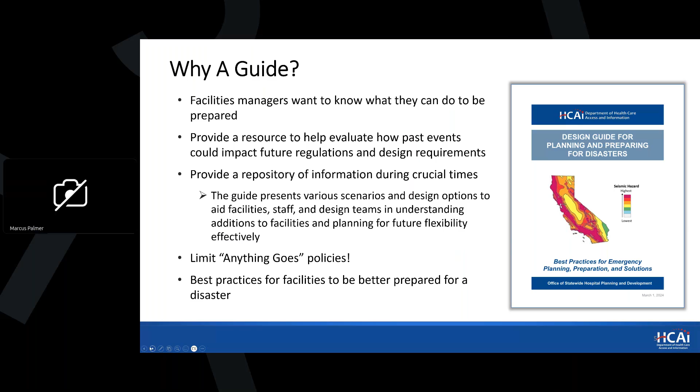It does quite a few different things. Of course, it provides various scenarios and design approaches for designers and owners for allowing flexibility for future design and construction. But it also does things like limit the anything-goes practices that were experienced during the pandemic. Ultimately, it boils down to providing a best practices guide for designing facilities to be prepared during a disaster.

The guide applies... man, I'm having trouble advancing, so bear with me a little bit.

The guide applies to new facilities as well as major alterations for existing facilities, ultimately providing planning for the unknown. Hard to design for the unknown, and that's what this guide is sort of targeted at. It ultimately provides flexibility in various different design things, adapting existing systems for facility access, utilities, emergency projects, and so on, as well as future design flexibility for future care options.

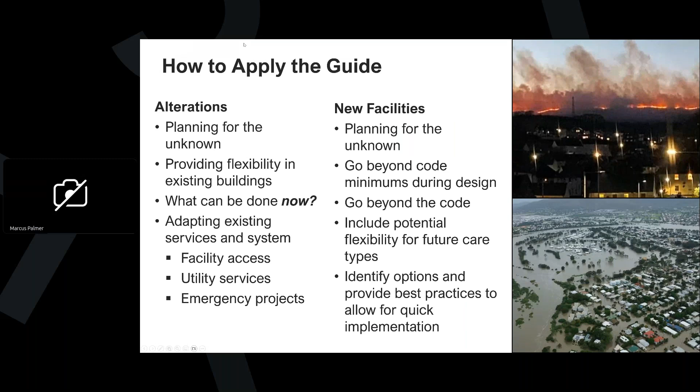Ultimately, it's a design guide that will show that designing beyond minimum code is going to be required. This guide's designed to be used by owners and operators, of course, design teams, local agencies, planners, contractors, and then, of course, other people who are involved in planning for future impacts.

So a little bit of history. It started during the COVID-19 pandemic, where all facilities got really caught by surprise and were struggling to find ways to provide safe environments for staff and patients that they were caring for. OSHPD was called upon to help mitigate and deal with some of these issues, like, how do I make everything negative pressure or 100% outside air and so on. Ultimately, as a result of all this, there was some discussion about whether OSHPD was going to change the code to incorporate these lessons learned during the pandemic.

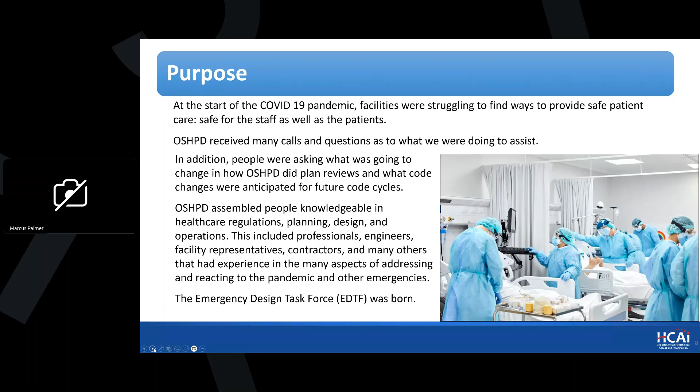So OSHPD assembled a group of people knowledgeable in healthcare design, planning, code, etc. And the Emergency Design Task Force was ultimately created. This task force, come on, slide. This task force was tasked with identifying not just things related to the pandemic, but also other maladies such as wildfires. The lag is killing me. Such as wildfires, earthquakes, floods, and so on.

And interestingly, it was determined that for normal everyday operations, current code was probably fine. But what about facilities that needed to be designed to accommodate other types of situations? For instance, a pandemic resilient and ready facility. This design guide also addressed many of those options to prepare for future events.

The technology and processes learned were incorporated into the design guide and offered options such as switchable air volumes, redundant services, or incorporating new technologies into practice. And this design guide tries to cover all of those things. So with that in mind, this design guide has great cross-sectional application.

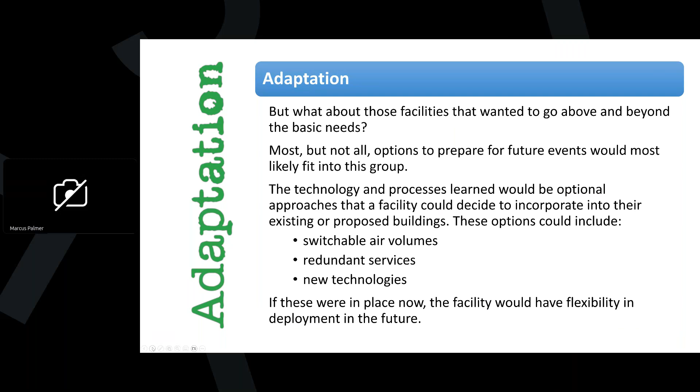Please advance. So, Janice, I'm going to take this one. I know

And with that, Janice, I will pass to you. Great, thank you, Gary. Oops, I think we skipped a couple of slides here. Apologies for the lag. Looks like we're going back to session objectives if we can. All right, so today's, oh. This is crazy.

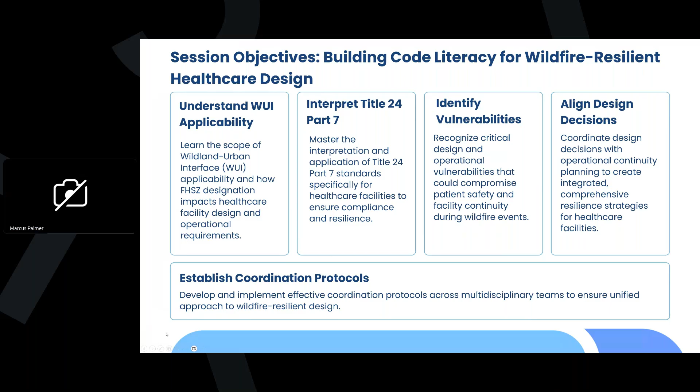And the reason this conversation has become so important is because wildfire behavior itself is changing. So why does this matter now? Wildfire behavior is evolving rapidly. We're seeing longer fire durations. We're seeing more destructive fire behavior. We're seeing broader smoke impact zones and increasing strain on infrastructure and healthcare systems.

And increasingly, we're realizing there really is no longer a traditional wildfire season. Wildfire is no longer a seasonal thing. This is really becoming a year-round operational concern. So one of the major lessons learned from recent events is that ember-driven ignition, and not just direct flame contact, is often the primary failure mechanism affecting buildings.

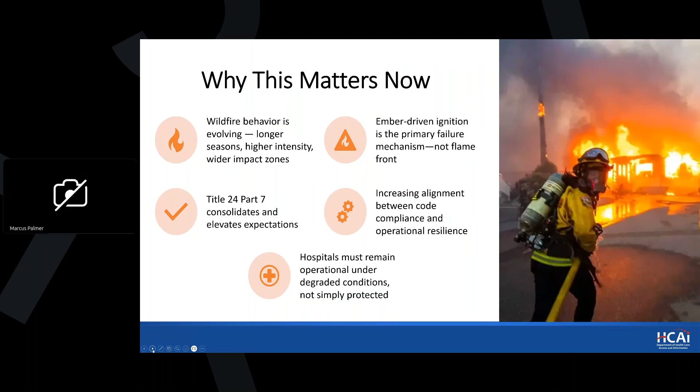And for hospitals specifically, the objective is not simply surviving the wildfire event. The real objective is maintaining operations during degraded or exigent conditions. So let's look at how our agenda today is going to be organized. We'll begin with talking about what WUI is and how fire hazard severity zones affect healthcare facilities, how Title 24, the new Part 7, applies. And from there, we'll transition into operational impacts, smoke readiness, and emergency planning considerations.

So first, what exactly is the wildland urban interface? And what is the WUI? WUI stands for Wildland Urban Interface, and it refers to areas where development meets or intermixes with wildland vegetation. For healthcare facilities, this matters because wildfire exposure is no longer limited to remote forested areas. Hospitals may experience operational impacts from wildfire even when the fire itself remains miles away. Next slide.

Once a facility falls within a WUI designated area, additional design and planning requirements may be triggered. And so with WUI designation, one of the important things to understand is that this is not just a map label or a planning exercise. Once a facility falls within a designated WUI area, that designation can activate mandatory code requirements tied to building materials, defensible space, vegetation management, and ignition-resistant construction. And these requirements can affect projects very early on, from budgeting and design assumptions all the way through approvals and long-term operational planning.

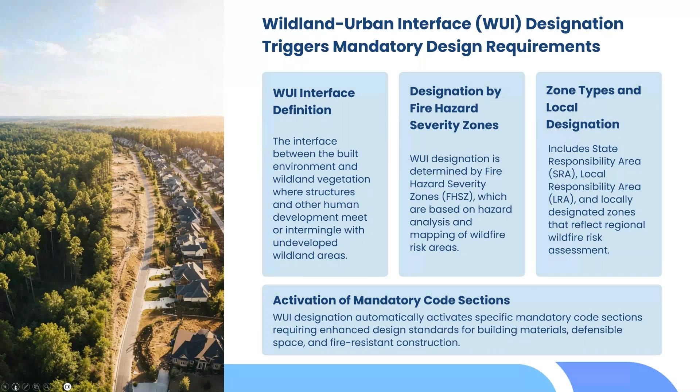Another important point is that wildfire resilience is a layered approach. There's no single feature or system that's going to solve this problem by itself. It's really a combination of exterior hardening, defensible space, infrastructure resilience, operational planning, and emergency coordination that collectively improves survivability and continuity. Next slide. So healthcare facilities will face several unique wildfire exposure pathways.

Healthcare facilities will experience wildfire differently than many other occupancies. What makes this especially challenging is that several impacts can occur simultaneously. You can have smoke infiltration affecting indoor air quality, along with road closures that are affecting staffing and deliveries and logistics, along with utility instabilities and public safety shutdowns, degraded visibility, and ember exposures occurring all at once.

And importantly, many hospitals experience operational disruption before flames ever approach the facility itself. So as an example, smoke alone can strain HVAC systems, impact vulnerable patient populations, and change how facilities operate day to day during an event. So wildfire disruption often happens without the building ever burning. Next slide.

So why does fire hazard severity zone matter? One of the primary tools in California that we use to classify these risks is fire hazard severity zone maps. One of the reasons these are so important is because they can influence multiple aspects of both facility planning and long-term operations. There are a number of different factors to consider, including construction requirements, defensible space obligations, insurance and risk considerations, campus hardening priorities, and long-term capital planning.

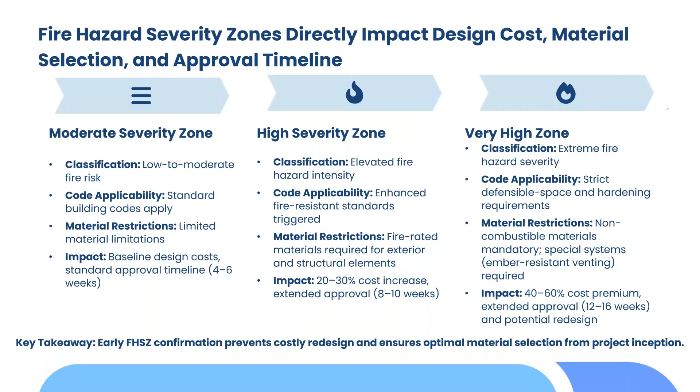These designations can directly affect cost, materials, and project timelines. As wildfire severity increases, you can potentially anticipate construction requirement increases, material restrictions, approval timelines can take a little bit longer, and there's a redesign risk that also increases significantly depending on what zones you're subjected to. So if you have early confirmation of fire hazard severity zones, this can help avoid costly surprises later on in the project. Next slide. So to help walk through how facilities determine their fire hazard severity zones, I'm going to hand this off to Nancy.

Thank you, Janice. So next slide, please. So how to determine if you are in a fire hazard severity zone. There are a couple tools to use, and one is right off of CAL FIRE's site. They have the map. You can use the QR code there to get to that. If you can go to the next slide, please. We at HCAI OSHPD have our EOC map as well, but we'll get to that one in a second.

But when you look at both of these maps, the SFM map and HCAI OSHPD, I'm going to want to say OSHPD first, but I'll try to remember to say HCAI first. But anyhow, if you look at both of these maps, you'll see the zones in the different colors as well. So you have your high severity and your moderate. You'll see those different zones, your moderate, high, and very high, in the different colors.

And what zone you're in, there are going to be different code requirements that come into play depending on what zone you're in and what applies, which code applies, does it apply when it's existing or is it just new, and we'll get into that a little bit too. But for now, just so you can use either of these maps. You can go to the next slide, please.

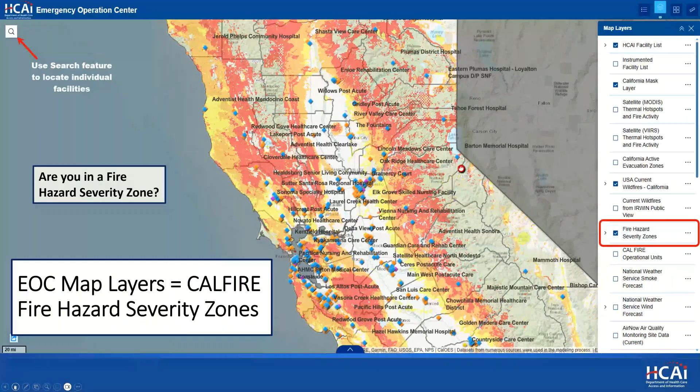Thanks, Nancy. So, as if wildfire hazards and WUIs are not self-evident, I'm going to pull us back into the hospital-specific aspect of the wildland urban interface. Next, please. From an operational perspective, of course, hospitals are unique occupancies. They operate on a 24/7 basis and have highly vulnerable occupants who have limited or no evacuation capability. So the challenges during a wildfire are inherent in that. And the fire department incident command group will need to account for this as the fire progresses and plan early.

What's unique also about hospitals is that we operate on a regional basis, and a closure of a single hospital can have cascading impacts across the system. At Cedars-Sinai, for instance, if we had to evacuate the hospital, where could we send 1,000 patients? Because that's what our census is today. What hospitals who are also full in the region could accommodate 1,000 patients? With that in mind, design failures have a community-wide public health consequence, and that's why we want to focus on our presentation today. Next.

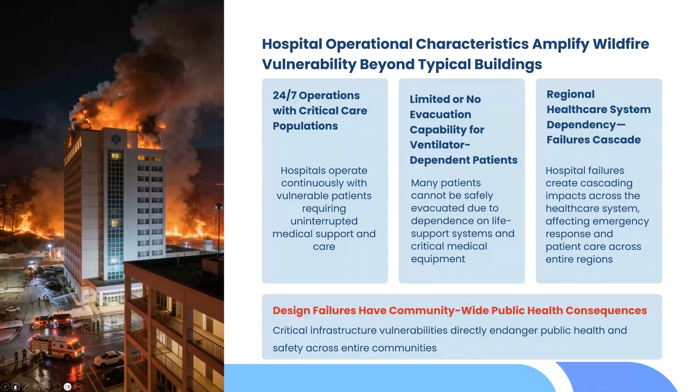Wildfires pose multiple challenges to a hospital, of course. Adding increased filtration, like a MERV 13 filtration system, can overburden the HVAC system. Killing outside air can have negative health effects if done over a prolonged period of time. Despite HVAC efforts, smoke infiltration still occurs, and that can obviously have a huge detrimental effect on respiratory challenged patients.

Wildfires have a tendency of disrupting power by just destroying power lines that feed the facility, or through the public safety power shutoff process that the power company may do. Lack of power, of course, at a hospital has a huge implication. Other things like staff inability to even get to work to be able to take care of the patients, or limited access for supply deliveries, like a fuel truck getting in to refill the generator.

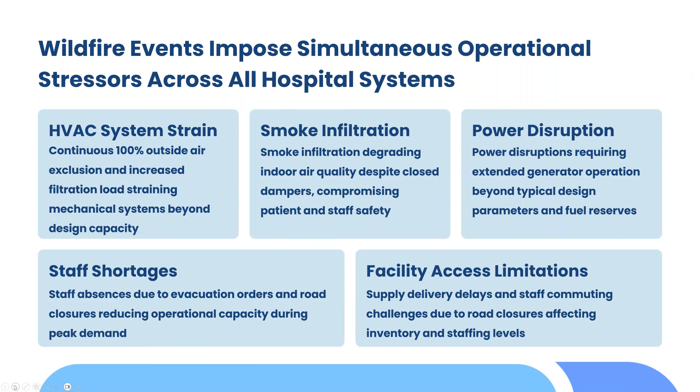All these things are affected by the wildfire and are unique to hospitals that are generally going to continue to try to be operational during the event. With that in mind, that's why all of the code stuff that we're going to go on to talk about today has huge implications. Next. All right, so talking about code stuff, let's go to the next slide, please.

So where did this all come from? So Part 7, it has its own part now. Well, your Part 2 is your building code and so on, but Part 7 is new, but the information in it isn't necessarily new. There are some new requirements, but what you were used to seeing in Part 2 in CBC Chapter 7A, a lot of what I'll be talking about these next few slides, was from 7A, and that's moved over into Part 7.

But also this became kind of a one-stop shop for what was already out there. You have your, like I said, CBC 7A, you have your CFC, your Fire Code, Chapter 49, Title 14, Public Resource Code requirements, the Health and Safety Code requirements, and the California Government Code. All that information was still out there. The user had to be familiar with what was in each of these to apply to these areas.

So what Part 7 does is just bring it to this one-stop shop, and it is based off of, like our other codes, the International WUI code, and California took it. We made some changes like we do, and now we're here. So again, it shouldn't be new to you if you've been doing this for a while. It's just all now in one location for you. Go to the next slide, please.

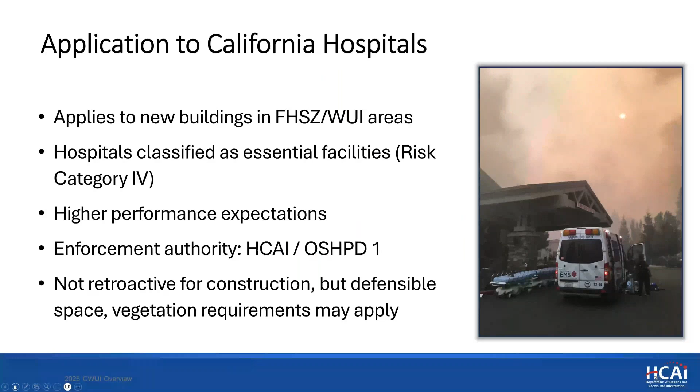So with the vegetation, again, yes, that has to be looked at, but that's going to be on the local side. And the requirement in there now is, as you see here, that prior to the building permit final approval, that vegetation management needs to be approved. So going back to that local AHJ form again, just like most of our projects, not every single one, but you got a new building, you're going to get a form from our reviewers on that first review. That's your local AHJ form with those 3 pages or so of the items that we would like them to look at.

We give that to the design professional of record on that first review. The design professional of record sends that out to the locals. And this is a courtesy to the locals, that we at OSHPD, HCAI, are always going to be looking at code minimum. But locals may have something else that they're going to want in place. So this form is that vehicle that allows them to say, hey, you know what, I've got a different requirement for my fire access road than what code minimum is. And they'll note that in there and we'll review to that.

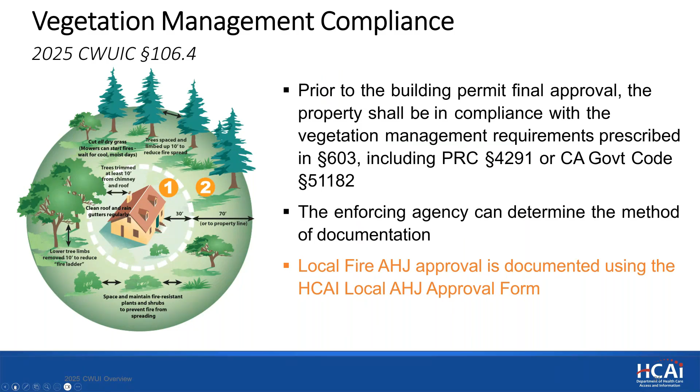So in this form, again, they're going to be noting the zone that the facility is in, and they're going to be looking at the vegetation, but that's going to be the project that's submitted to them, that they need to look at that part of it, along with some other things. So if we could go to the next slide, please, we'll talk about some more of those crossover areas. As I already mentioned, the fire access road, that is one. We want to make sure, do they need more than what code minimum is? But in addition to that, if they're in a CWUI area or fire hazard severity zone area, there are additional requirements that need to be met for the fire access road.

Water supply: there are requirements that you're probably familiar with from CFC Chapter 33 when the building's under construction, for any building. But when the building is in a CWUI area, there are additional requirements for water supply during construction. So this is something to be mindful of, because the project's coming to us, we're looking at that water supply, and you need that there before construction, but locals may want something different. So that's another one you want to be on early on. The requirement is that the water supply is there prior to and during the time of construction. So again, that's something we need to look at early on along with locals.

And then there is an exception, though, if locals say, hey, we've got an alternate plan, we've got tankers, we've got what we need. There is an allowance there for the alternate. But again, just be mindful of the timing of this, because you need that water prior to and during construction, we've got to have that communication with each other. So the approved water supply, how much do you need? When does it need to be there? We're looking at that. There needs to be standby power for that water supply.

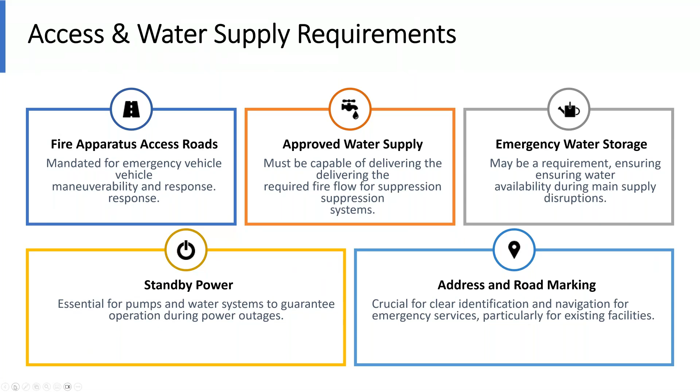Next slide, please. I kind of just went through what the next slide actually is, but again, the fire access roads have more stringent requirements like the width, the grade, the turning radius. As I mentioned, what's the required flow and the calculations that need to be there? What is that for when you're in a CWUI area? And are locals okay with an alternate, or do they want that in place before construction? And then the backup power again. Next slide, please.

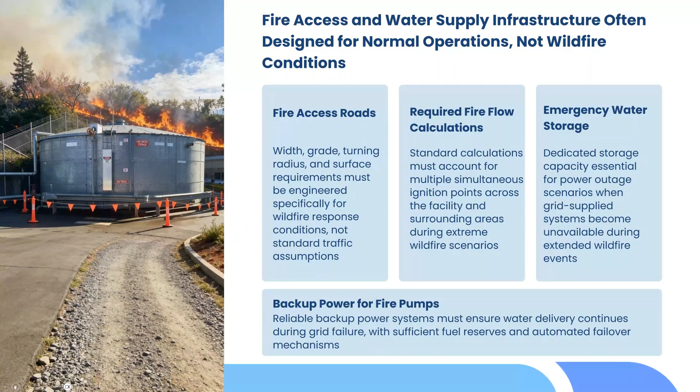What's going to happen if you have a fire in the area and you can't get somebody to the facility, and you need fuel? Anyhow, we'll get to that. Electrical grid failure can happen as well. Go ahead to the next slide, please. But we'll stick with what we are doing to our building to help protect it, hopefully beforehand, and then we'll get to what happens after.

So for OSHPD and HCAI, what we're looking at comes to a handful of things. There's a lot that the owners are responsible for, and the design professional is looking at for the project as a whole. A lot of what's happening on the outside of the building: the vegetation, the access, the emergency water supply. But when you get to the building, what are we looking at? We're looking at roof assemblies. How are the eaves and soffits protected? What requirements are in play for the vents?

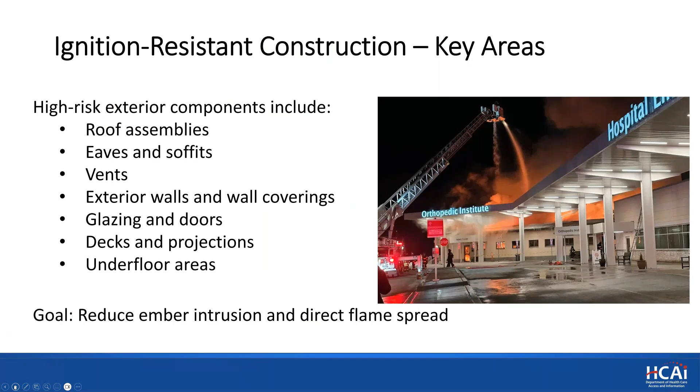Some of these requirements are going to apply to the accessory and miscellaneous structures that are adjacent to these buildings. So you may have something like a trellis. You never thought you really had to look at that before. If you're in a CWUI zone, or I should start saying the fire hazard severity zone, you would look at these accessory structures: trellises, patio covers, gazebos. They could be enclosed or open, but depending on their location to the building and their size, there are requirements for how these have to be protected.

For example, if the miscellaneous or accessory structure is less than 3 feet from the building, it is going to have to be constructed the same as your building, same construction type. Then, with that give and take of the code, as you get further away or smaller in size, different requirements come into play. So if you've got an accessory structure that is greater than 120 square feet, and it's between 3 feet and 50 feet to the adjacent building, there are still requirements that the accessory structure has to meet, and it again may need the same construction type as the main building it's adjacent to. I'm not going to go through every single point, but that's something to keep in mind.

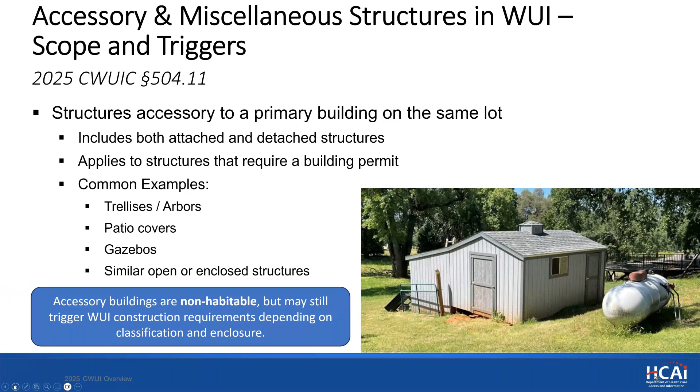And that's one of our crossovers again, because oftentimes those buildings are not going to be in HCAI or OSHPD's review. That's going to be on the local side. So a lot of communication is going to need to happen if you have these. Next slide, please. This just takes that a little bit further. Again, they may be enclosed or may not be. You're going to be looking at the distance to the building and the size of that structure, and different code requirements will come into play. Next slide, please.

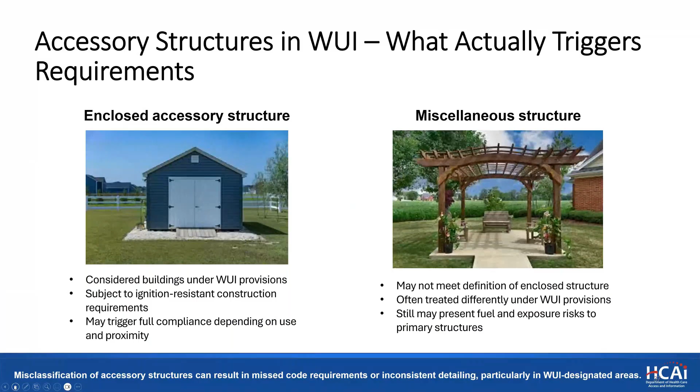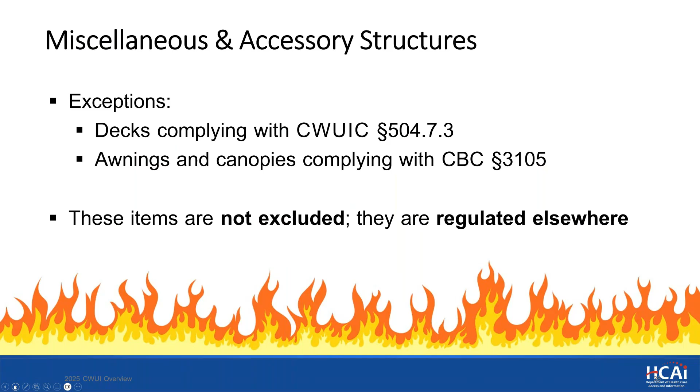We mentioned the decks already, but when you have decks, there are specific requirements for them in 504.7.3. And awnings and canopies have their own requirements in Chapter 31. So you still have to go into the building code. You can't use CWUI in place of the building code. You still have your building code requirements; this is in addition to. So keep that in mind. When we're looking at canopies and awnings, they're in Chapter 31, and there are still requirements for those. Decks you'll find here. Sorry about that. But anyhow, look in both of these. Next slide, please. And then roof and eaves, of course, those are big.

If embers are going to get into the vents, you're going to get underneath that eave, underneath those projections. There's requirements for these. Your roof's going to have your Class A roof covering. Again, remember that goes for those accessory and miscellaneous structures as well. They're also going to need that Class A roof, again, depending on their location.

You can have open eaves, but there's going to be more stringent requirements for those. So the enclosed eaves are preferred. There still are requirements for those eaves. You have metal flashing at your roof valleys. You want to prevent the debris accumulation. So there's requirements for that, for the gutter protection, which of course we're not going to see that very much.

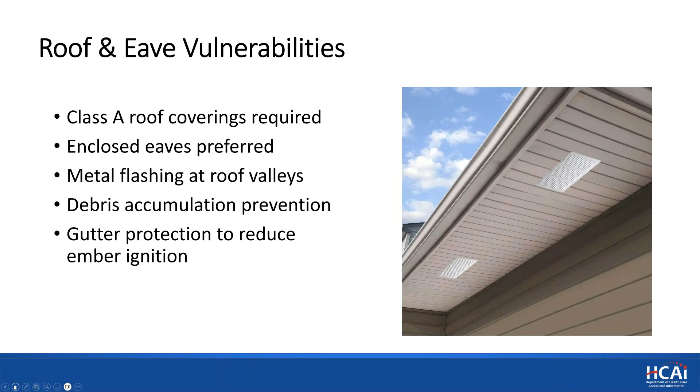But the vents, next slide, please. Requirements for vents, whether they're horizontal or vertical. They have to be tested per ASTM E2886. Next slide, please. And there's also going to be a mesh opening requirement. What size can that mesh be on that vent? And then they have to be CSFM listed assemblies as well.

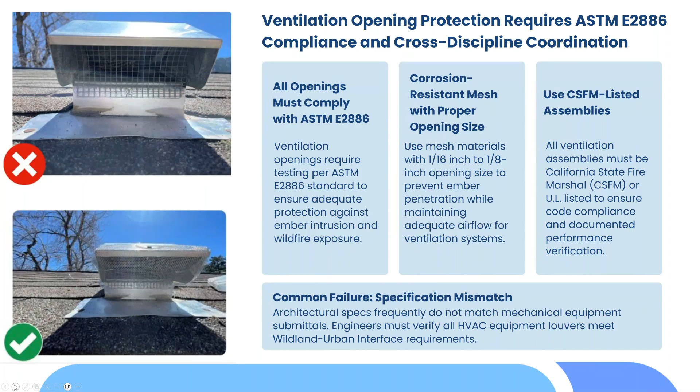So again, with that communication, we have your architectural specs. You've got to make sure that matches your mechanical equipment and make sure all these requirements are in place. And next slide, please. And don't forget your spark arresters. There are requirements for spark arresters as well.

And then for the walls, glazing and doors, they may need to be rated. So if they need to be rated, then you've got to meet all those requirements. So don't just stick, again, you've got your crossover CBC, CWUI. You may have requirements or allowances in Chapter 5, 6, and 7 that no longer apply here because this is more stringent. So they may indicate, oh, you don't need to be rated because of your fire separation distance. But if you're in a WUI zone, now you're back to being rated.

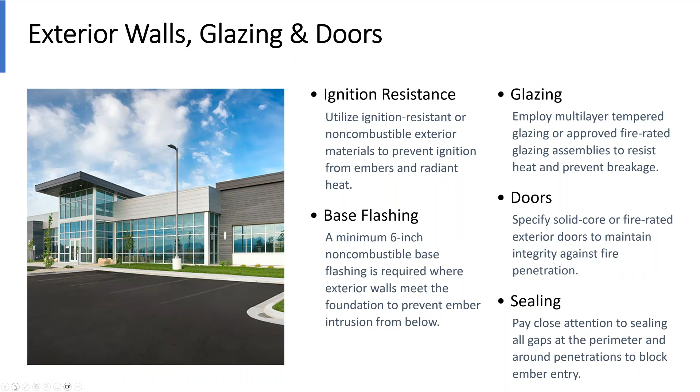So making sure that you look at that and make sure your components are rated when they need to be. There's language for sealing gaps as well. They're in CWUI. Next slide, please. We'll rush through that. And I think Gary will talk more about the MERV and the different requirements here for the filtration.

Thank you, ma'am. So talking about smoke readiness for healthcare, it generally boils down to filtration upgrades and indoor air quality monitoring. And without going into too much detail, filtration, upgrading filters to MERV 13 or better, if the air handling system isn't designed for that, that can put a real stress on it and may not even be a possibility. Indoor air particulate monitoring is also something that will be needed during these wildfire or smoke events. And the consideration of establishing clean air smoke zones when possible in critical areas.

Having the availability of these MERV 13 filters or other filters needs to have a strategy, and of course, the filters need to be on site and available when the event happens. So planning ahead of time is important for that consideration. Next slide, please.

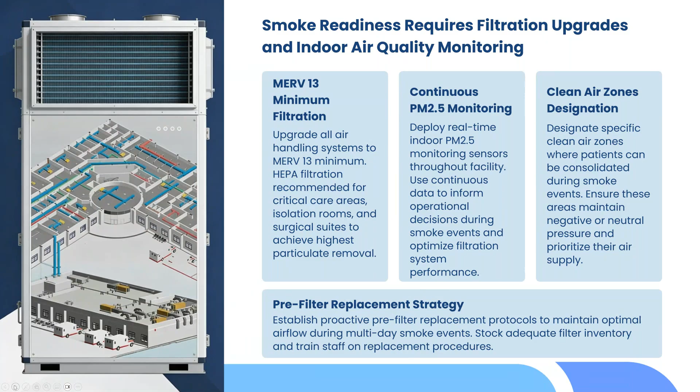Points to consider when planning for smoke readiness include reduction or elimination of outside air intakes for a period of time, making sure that the building doesn't get sick. Increasing airflow throughout the facility or in designated areas like waiting rooms, emergency departments, ICUs, ORs. Maintaining and being cognizant of the pressure relationships during this time to maintain infection control considerations, and then increase filtration.

We've talked about MERV 13, but carbon filtration might also be an option, which of course requires even more horsepower from the HVAC system. Something to bear in mind, though, is pandemic operations are fundamentally different than smoke operations when it comes to HVAC. So having the flexibility to switch from positive pressure to negative pressure to 100% outside air is all part of this important consideration.

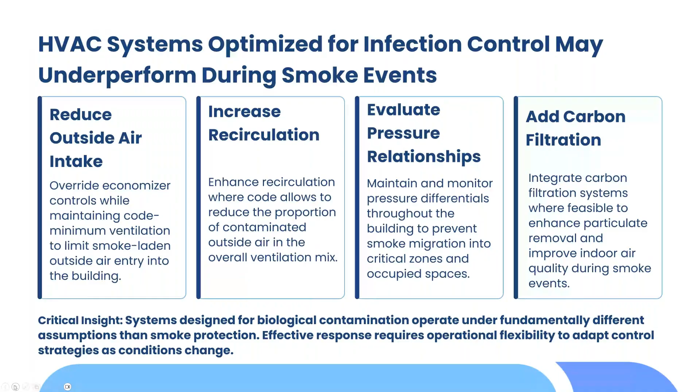The use of portable filtration or cleaner air spaces is something that can be done. It needs to, of course, be planned early. These HEPA filter systems come in all different sizes. They can be used to clean the air in a single room or in a critical area, and need to obviously be in place before the event. Next.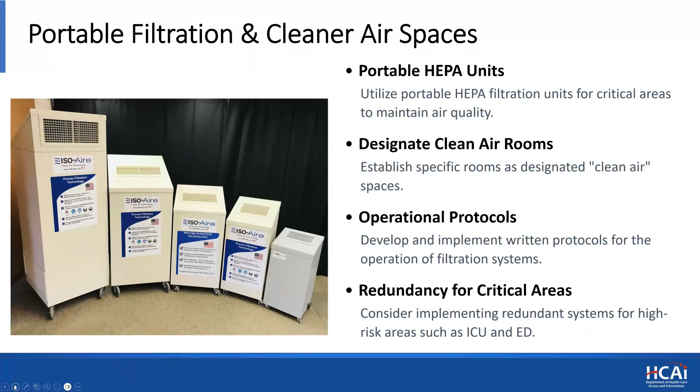What we've heard so far is that smoke readiness and filtration planning require both technical design and operational flexibility. So now I'd like to transition into broader operational and emergency planning considerations that we should take during wildfire events. Next.

This next section shifts the discussion from building hardening to operational continuity and emergency planning. At this point, the question now becomes, how do we keep hospitals functioning under stressed, exigent conditions? Because during wildfire events, facilities can be dealing with degraded air quality, staffing shortages, infrastructure strain, regional evacuations, and increased

patient demand simultaneously. So what would be good is for you to start testing before the wildfire season. And one of the most important things facilities can do right now is to do that, before these wildfire conditions emerge at any point during the year. So that includes HVAC, smoke modes, damper controls, pressure relationships, filter seating and sealing, and identifying operational weak points.

You don't want to discover these system failures during a wildfire event. You want to identify these vulnerabilities during planning and testing, and not during an active incident. Next.

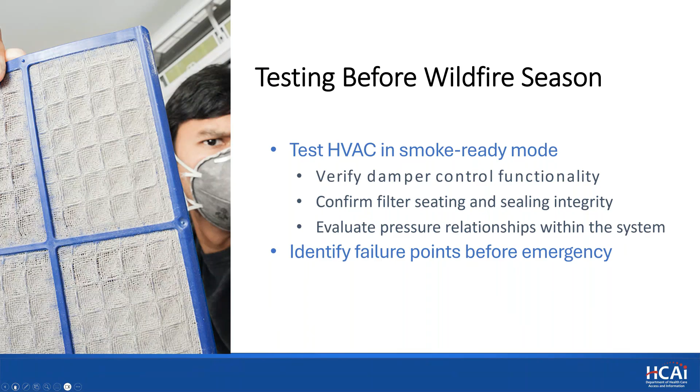Smoke readiness planning really requires coordination between facilities, engineering, infection control, operations, and emergency management teams. And it's not simply just about changing filters. You really should be thinking through how HVAC systems will operate during different scenarios, during prolonged smoke events, where vulnerable patient populations might need some additional protection, how indoor air quality will be monitored, and what operational adjustments may need to occur over multiple days.

Another important consideration is the staff's familiarity. Even strong technical systems can struggle if staff are unclear about operational protocols, escalation pathways, or smoke response procedures. And written checklists and exercises become very important. Next.

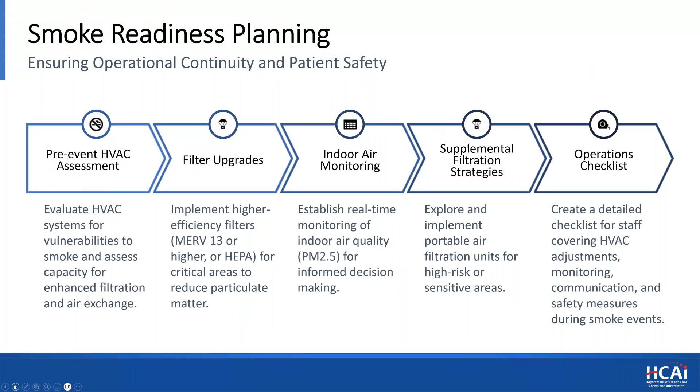One challenge we continue to see is that many backup power assumptions were not originally developed around prolonged wildfire conditions. Historically, generator planning may have assumed relatively short duration outages, but wildfire events can disrupt power infrastructure for extended periods and sometimes well beyond your traditional assumptions.

So facilities should take a look at generator runtime duration, fuel supply logistics, increased HVAC electrical demand during smoke events, and how load prioritization decisions can affect patient care operations. More importantly, wildfire conditions can also affect fuel delivery itself through road closures, regional demand spikes, and transportation disruptions. Next.

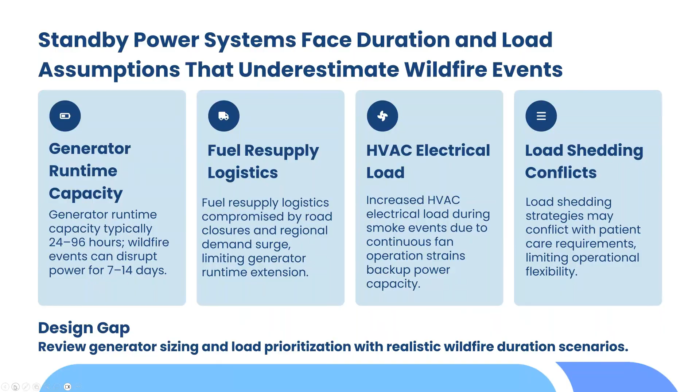One of the difficult realities during wildfire events is that hospitals may experience increased demand while simultaneously operating under cascading impacts or degraded conditions. You can see more respiratory illness presentations, displaced community members, nearby facility disruptions and outages, and staffing shortages all at the same time. So surge planning is not just about finding more space. It's about maintaining a safe operation while that demand is increasing all around you. Next.

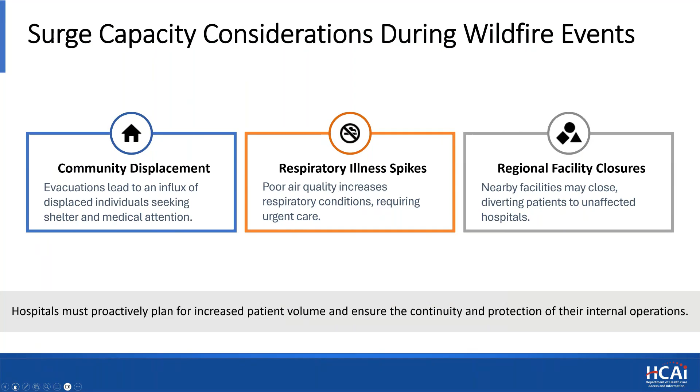This is another area where operational planning becomes very practical, and partnering with your local fire department or emergency management on a pre-fire plan or practice drill can help. During regional emergencies, facilities might need to think differently about patient arrival patterns, traffic flow, ambulance coordination, and exterior screening or triage operations. Even simple things like, what does protected outdoor triage space look like?

What does that setup look like? What does clear signage look like? Do we have those ready? Or separating ambulance and walk-in pathways can significantly improve operational flow during high stress events.

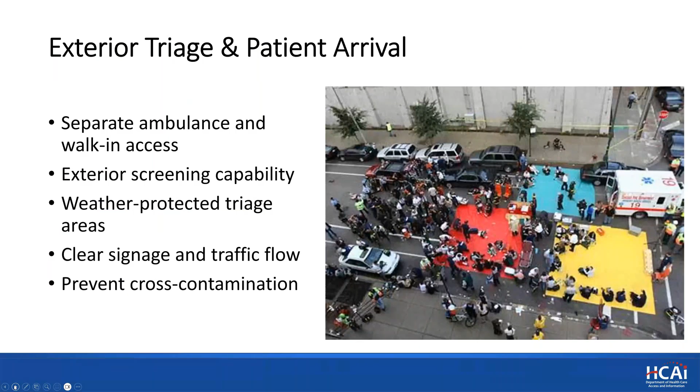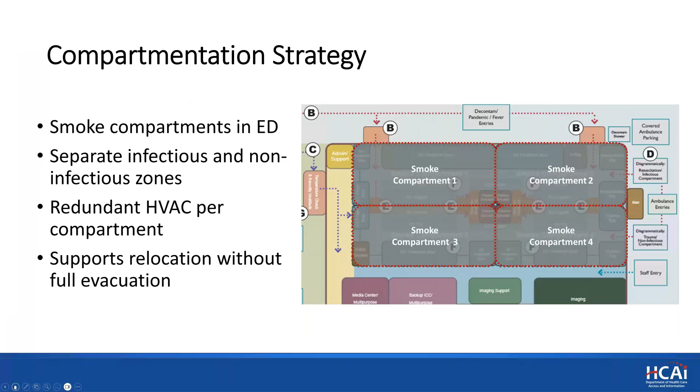Next. And internally, compartmentation strategies can provide additional operational flexibility. Compartmentation can help you to isolate operational impacts in a shelter-in-place scenario. This would support relocation within the facility, smoke isolation, and continuity of operations during emergencies. Next. And to close us out, Gary will discuss shelter-in-place decision-making and final operational continuity considerations.

Gary, are you off mute? Thank you. I told everybody to make sure to unmute yourself and then didn't do it.

Janice, from your previous slide, webinar session number 4, which hasn't been scheduled yet, coming later this year, will go into much greater detail about designing the facility for these types of events, with these patient arrival and smoke compartmentation designs in mind. Thanks. Go ahead forward, please.

So talking about shelter and the strategy for evacuation, by design, hospitals have a default strategy of shelter in place. You cannot realistically evacuate hospitals unless the threat is to the point where literally the building's catching fire. There are lots of different related challenges, of course. Some of the decision factors that weigh in are indoor air quality, the structural status of the building, power, road access, and so on.

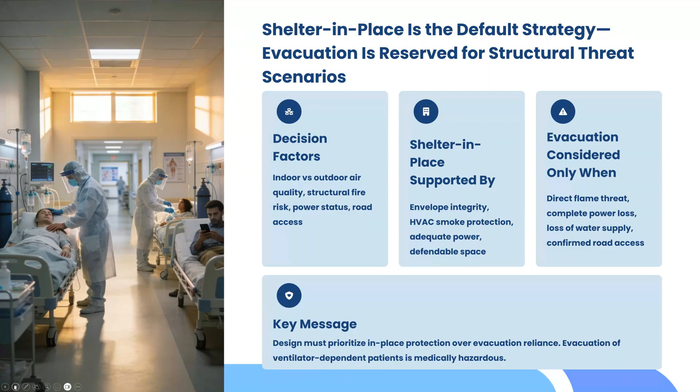If your facility is located in a wildland urban interface, now would be the time to begin identifying alternate care sites. Off-site surge locations need to be identified and put in place in advance. Need to evaluate the availability of utilities and ventilation capacity, but understanding that these remote sites are resource intensive and are certainly not ever a first choice, so as a last resort.

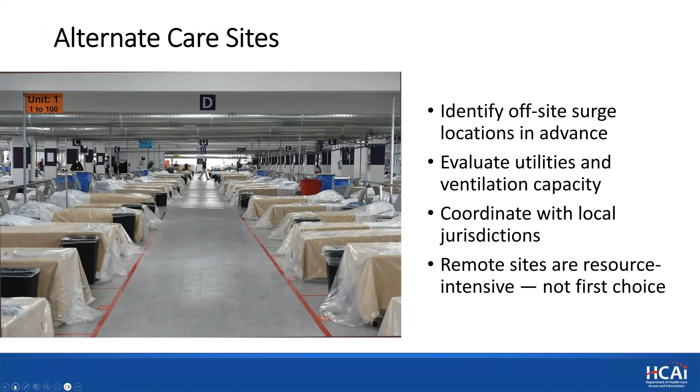So from an owner's perspective, what can I do now? What are the things I need to be thinking about now? First, look at your fire hazard severity zone designations, both the state responsibility areas and the local responsibility fire hazard severity zones. Verify what zone your facility is in, and be aware of those contingencies and exposures. Conduct a vulnerability assessment of the exterior of the building, and then update the hazard vulnerability assessment of the entire operation.

Review your generator capabilities and fuel supply. I could tell a story about a hospital in Southern California during one of the fires where literally the fire burned to the exterior walls of the building. They lost power. The generators kicked on and everything worked great, except the fuel pumps from the underground fuel storage tanks were not on emergency power. So when the day tanks ran out of fuel, the hospital went black. This is something that obviously needs to be identified early.

Test your HVAC smoke mode. Do it regularly and have schedules to test it and make sure everything's operational. And then, of course, aligning capital projects with the WUI requirements, which flows into the next slide.

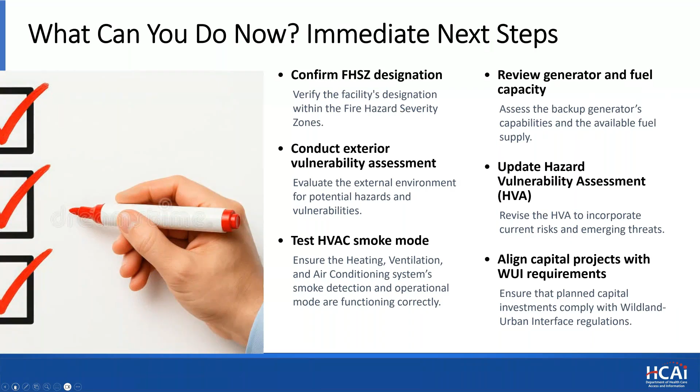Establish coordination protocols with all of the important design players, especially MEP designers, civil and landscape disciplines, to ensure that these comprehensive WUI integrations are maintained and, of course, designed and constructed. Align your design decisions with operational goals. This is pointed at the owners. Owners need to be involved in the design and stay involved in the design and the construction of the facilities in these wildland urban interface areas. Owner involvement is really critical and key.

And then lastly, of course, engage the facility leadership on the resiliency strategy. Owners need to not only be involved, but share their operational goals, needs, and design requirements for the entire development and construction of the building.